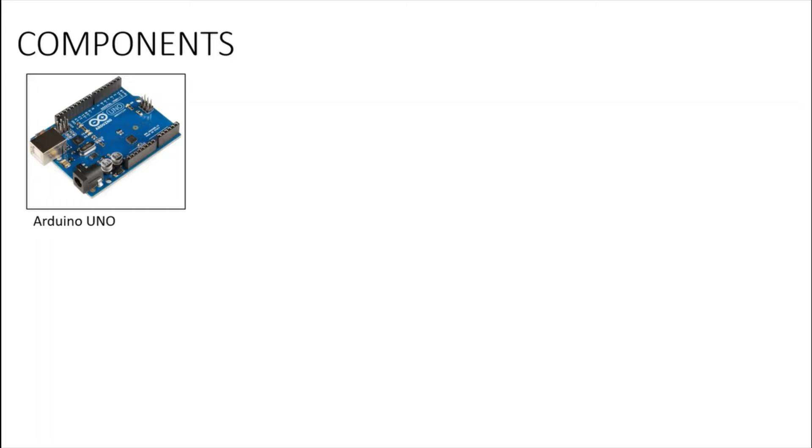These are the components which we are going to use in our project. We have designed this SCARA robot using SolidWorks. It is user-friendly software and thus provides flexibility for edits and good design. Okay, let's get back to the model and discuss the design.

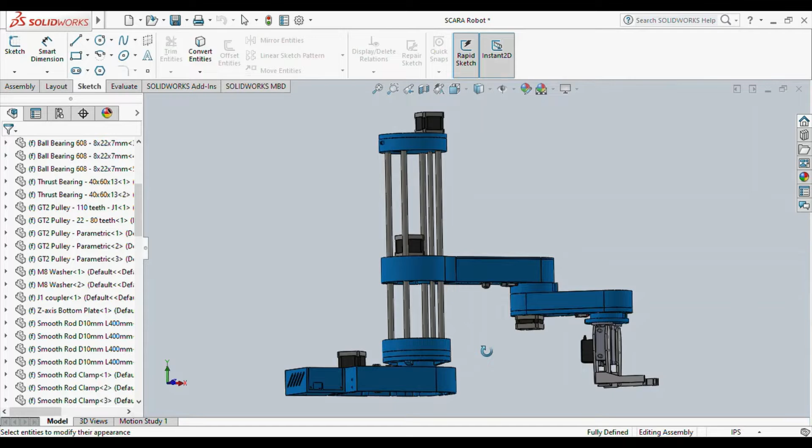Our goal for the robot was for most of the parts to be 3D printed. So everything we see here can be 3D printed, even on a 3D printer with a smaller printing bed. The robot joints are composed of two thrust bearings and one radial bearing. The GT2 pulleys are also 3D printable. We use parametric design to make them, so if needed we can easily change their sizes.

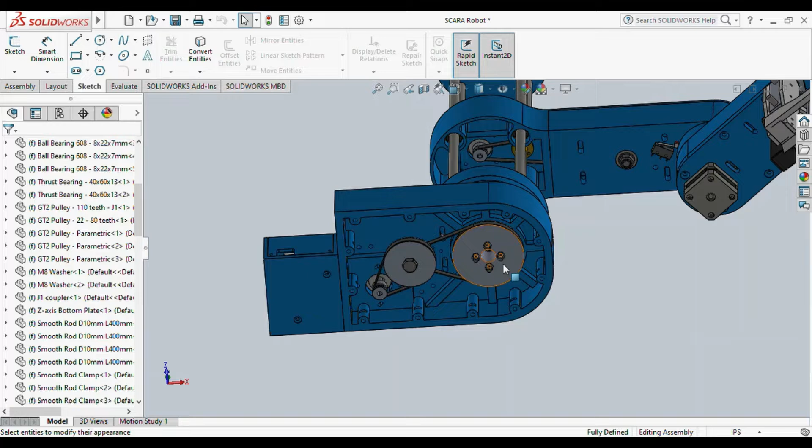For the first joint we have a 20:1 reduction ratio achieved in two stages with these custom designed pulleys. The two GT2 belts we use here are closed loop with 200 mm and 300 mm length. The length of the GT2 belt depends on the centerline distance between two pulleys. For the second joint, we have a 16:1 reduction ratio achieved in the same way, and the third joint has a 4:1 reduction ratio with just a single stage reduction.

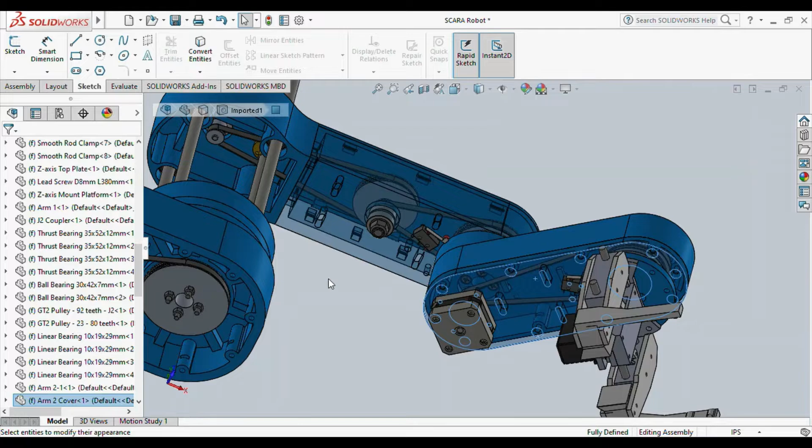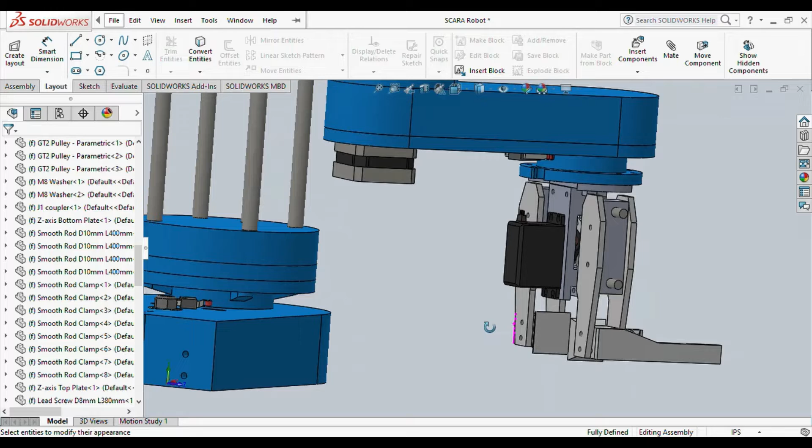The joints are hollow, so we can use that to pass through the wires from motors and micro switches. For some belts, we may need to attach idler pulleys for tensioning them. The robot gripper is driven by an MG996R servo motor, and we can easily change the gripper ends to achieve different grip sizes. The Z-axis of the robot is driven by an 8 mm lead screw, while the whole arm assembly slides on four 10 mm smooth rods and linear ball bearings.

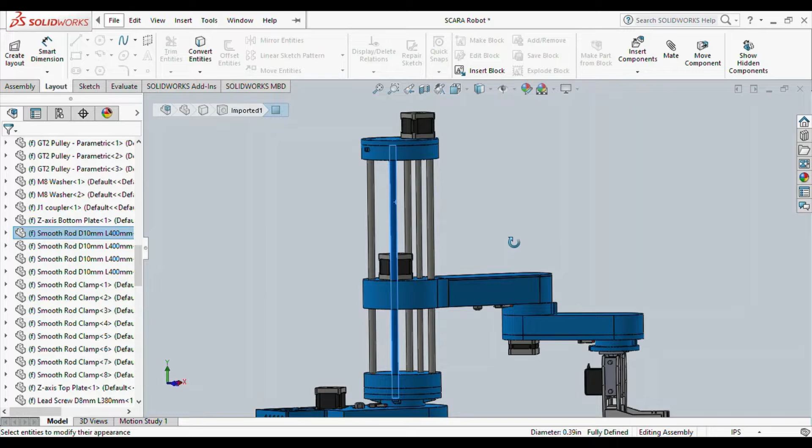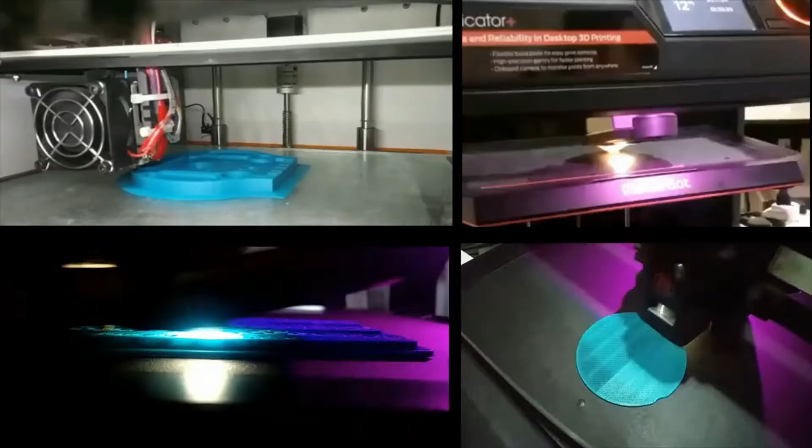The height of the robot simply depends on the length of the smooth rods, which in this case are 400 mm. The lead screw needs to be 2 cm shorter in order to fit this configuration. The Z motor can be raised by 2 cm using spacer nuts. We have used AccuCraft and MakerBot manufactured 3D printers for printing our parts.

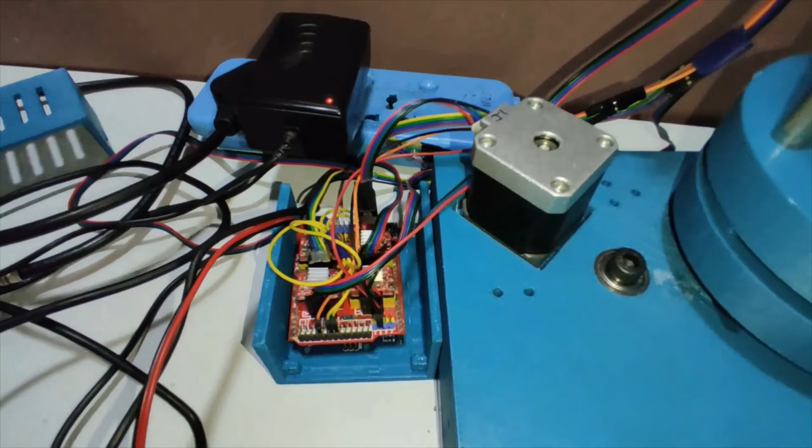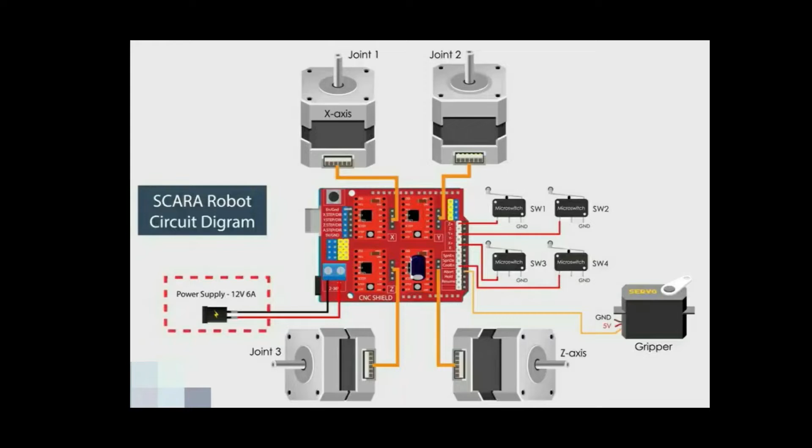Here is the circuit diagram of this SCARA robot and how everything needs to be connected. For driving the stepper motors, we use A4988 stepper drivers which are connected to a CNC shield. For powering the robot, we need a 12-volt power supply capable of providing a minimum of 2 amperes. Of course, this depends on how the stepper drivers' current limitation is set.

We have used the Arduino IDE software to program our robot. First, we have included the AccelStepper and Servo libraries. With the help of these libraries, we can easily give speed, acceleration and direction to the motors. Now, here the variables are created and different pins are assigned to them. We have assigned digital pins to the stepper motors and an analog pin to the gripper servo motor.

Whether a pin is an input pin or output pin is declared in void setup. Stepper motor speed and acceleration are also set in this section. Now, in void loop, if serial contains some data, then the if condition will run, otherwise it won't. As soon as we press some button on the graphical user interface, data will be generated in serial and this if condition will run. The readString command will read data from the serial and store it in 10 different places with the help of a for loop. And in this way, the extraction of data from the graphical user interface is done.

Now let's see the working of the SCARA robot, which will be operated with the help of the graphical user interface. So here we will first move each actuator and save different positions to which we want our arms to move. The different positions will be stored in the Arduino. J1, that is joint 1, is used to control rotation of the base. Similarly, J2 controls the rotation of arm 1 and J3 controls rotation of arm 2. The gripper can be controlled with the help of the scroll bar given at the right side of the graphical user interface.

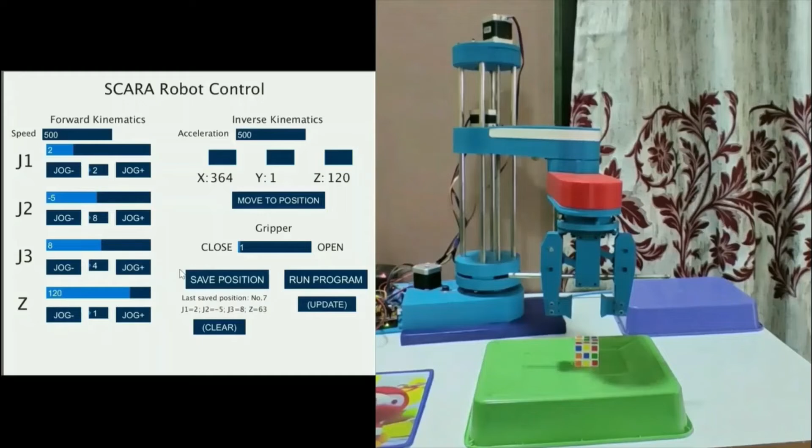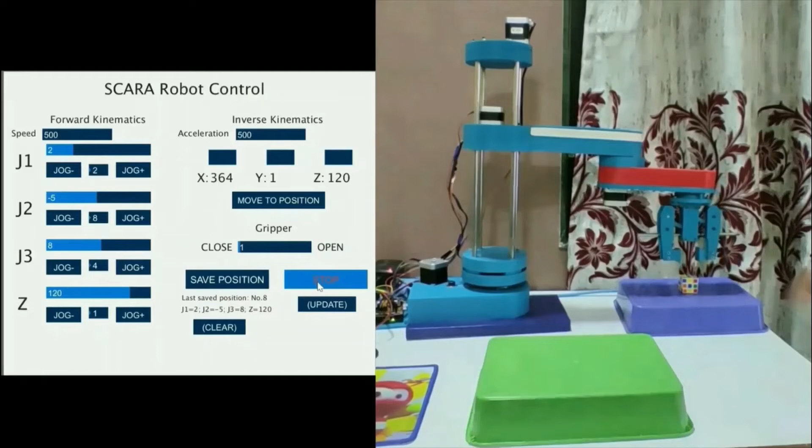Thus here 8 positions are saved. So now as soon as we are done with the sequence, we can press the run button. After that, the robot will execute the same sequence in a loop until we click the stop button.